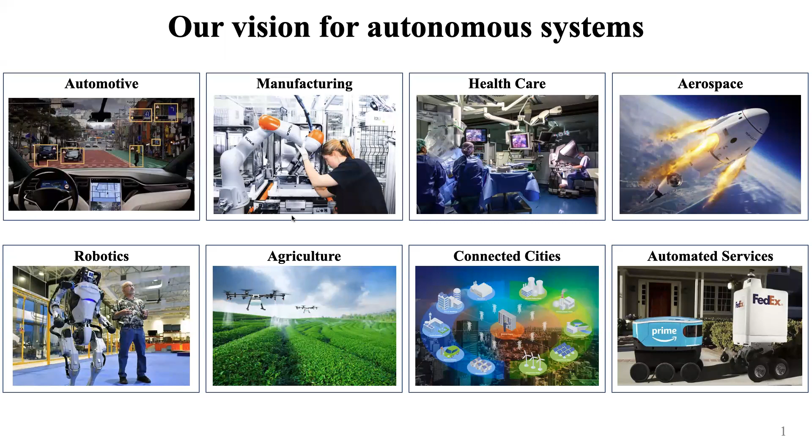Over the past years, the wide availability of data coupled with computational advances in machine learning and AI has really accelerated progress in building these autonomous systems. I've shown three videos here where you can see autonomous systems perform highly challenging tasks: Boston Dynamics robots, Tesla cars, and a drone fleet from the Kumar lab doing challenging tasks.

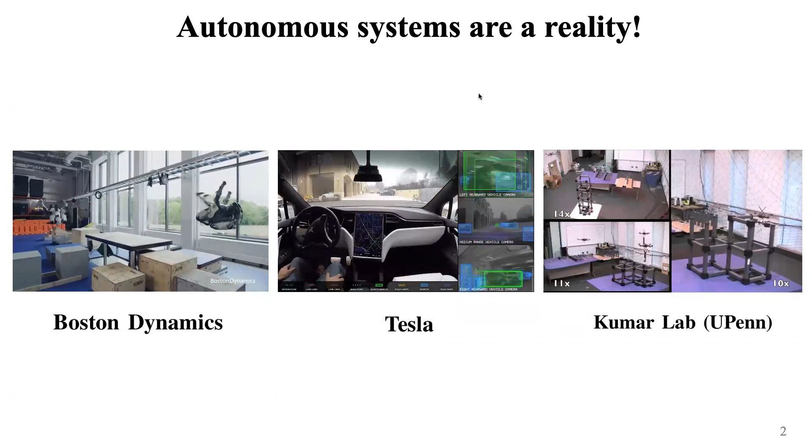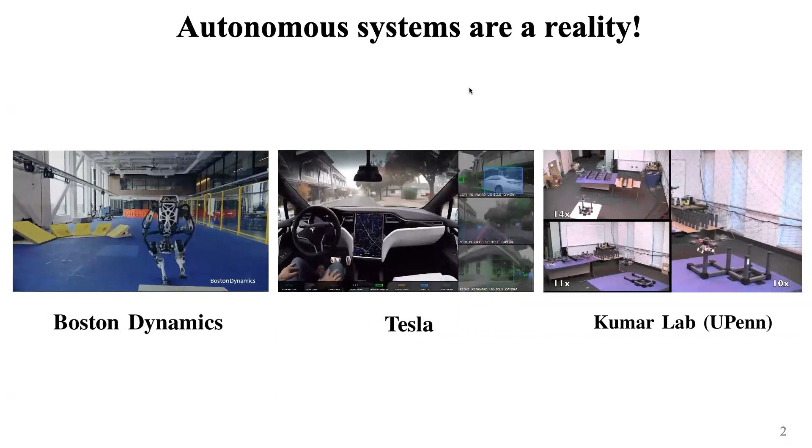From these demonstrations, one could certainly claim that autonomous systems are a reality. However, the question I would now like to ask is, do we really have all the theories and tools at hand to build autonomous systems that are also safe? I would argue the answer to this question is no.

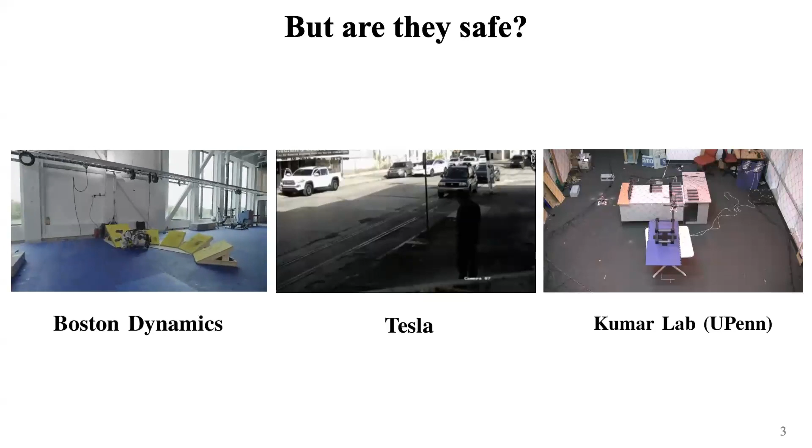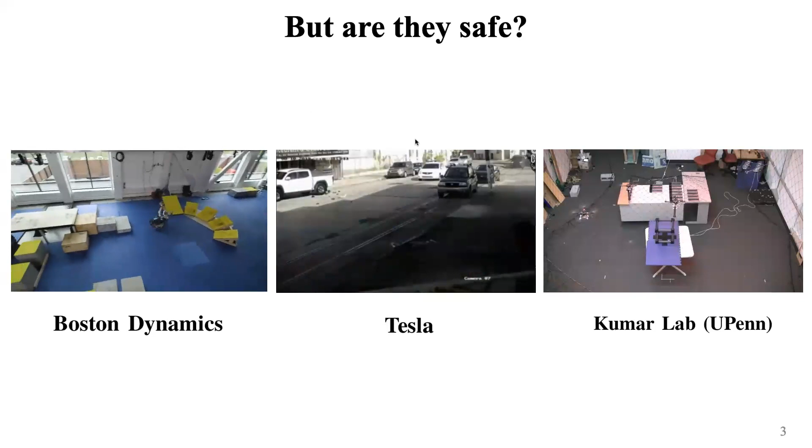Simply because at the same time we have observed a lot of failed demonstrations. We have seen Boston Dynamics robots failing, Tesla cars crashing, even endangering human lives, unfortunately in some cases even killing humans, and we have seen drone fleets collapsing. Even more so, it turns out that learning-enabled systems are fragile.

Going back to 2015, there was a big hype about self-driving cars, which there's still a big hype about. But as of now, we really don't have fully autonomous cars. Even worse, the industry has reset its expectations to only level 4 autonomy, meaning we will only achieve full autonomy in certain more controlled environments.

Due to these challenges, researchers, for instance from MIT, have focused on more solvable problems such as autonomous boats. So what are the problems and challenges we're facing? One problem is that the way we train our AI is fundamentally flawed. We train and tweak our algorithms in lab-like environments that then fail in real settings and under real circumstances.

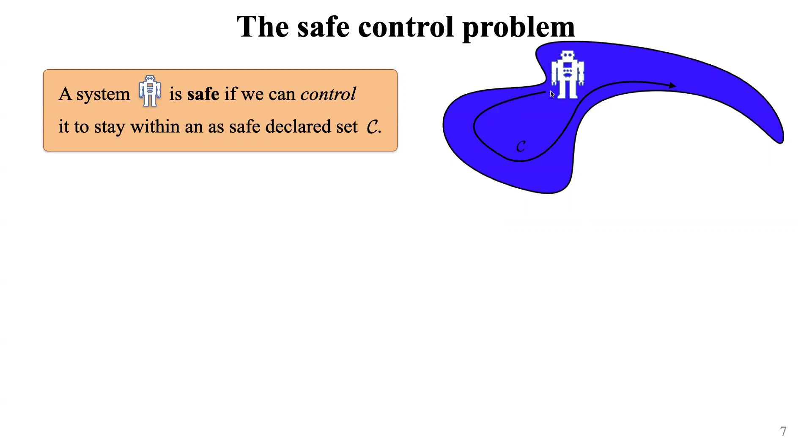So if we have a robot here and the safe set, the blue region, the robot is safe simply if we can control it to stay within the set. This is, of course, a well-defined and well-studied problem.

There are many existing techniques, one being simply handcrafting safe control laws, but this is typically limited to simple systems and often doesn't provide safety guarantees, for instance if we can't find suitable Lyapunov functions or something alike.

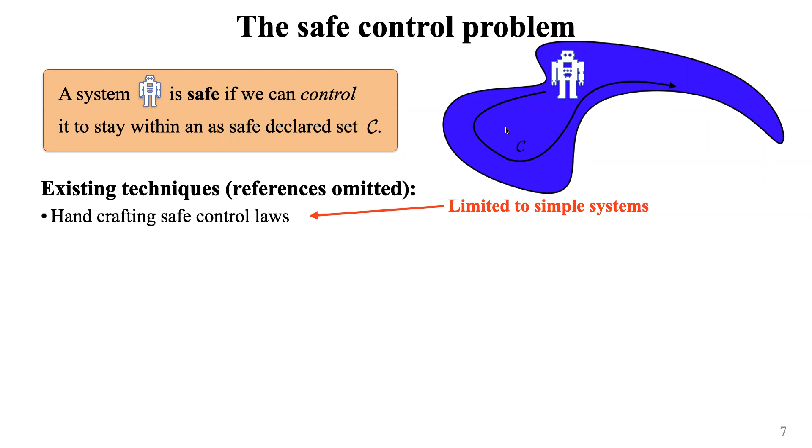There's a large body of work on sum of squares programming, Hamilton-Jacobi-Bellman reachability analysis, and discrete program synthesis, which comes more from the computer science domain. But all three share scalability issues, and using these techniques requires approximations.

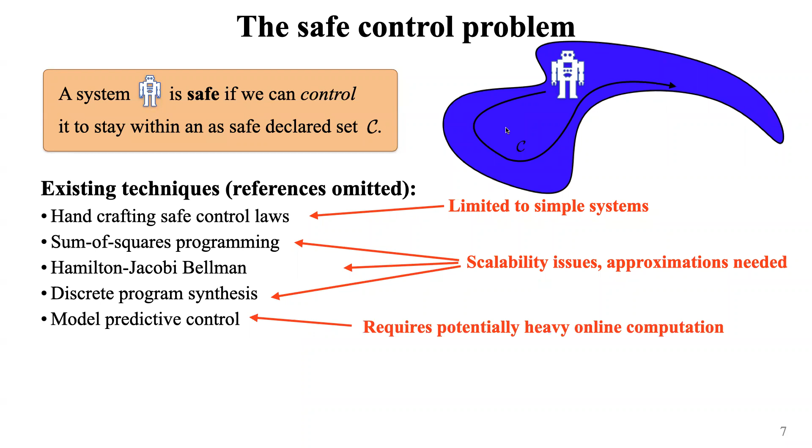Model predictive control is also widely used, but there one may require potentially heavy online computation, which can be restrictive. So in summary, finding safe control laws is challenging.

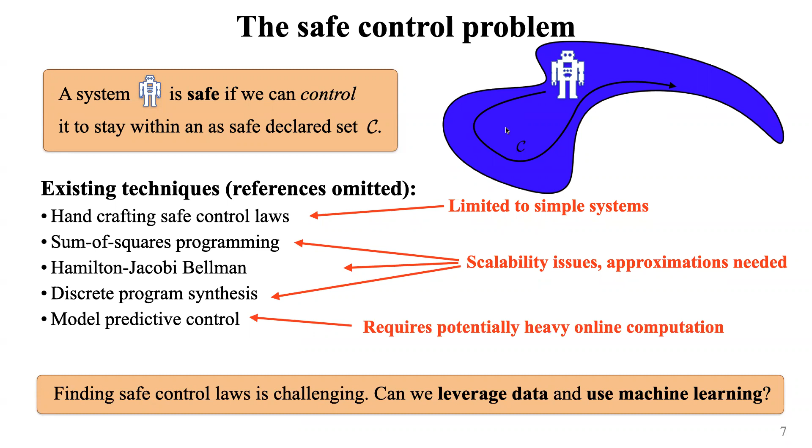However, I'd like to argue they share key properties that let us reason about their safety in roughly the same way. First, these examples are data-rich, in the sense that it's easy to get data exhibiting safe system behavior. For instance, in autonomous driving, we have a lot of safe driving behavior at hand.

Second, the dynamics of these systems are highly complex. They are nonlinear and often hybrid, meaning the systems are described by continuous motion as well as discrete events. For instance, when the bipedal robot's leg hits the ground, that's a discrete event.

But on the other hand, these dynamics are really well understood, and we have good tools to model our systems accurately. In this part of the talk, we want to use the availability of data as well as good models to learn safe control laws.

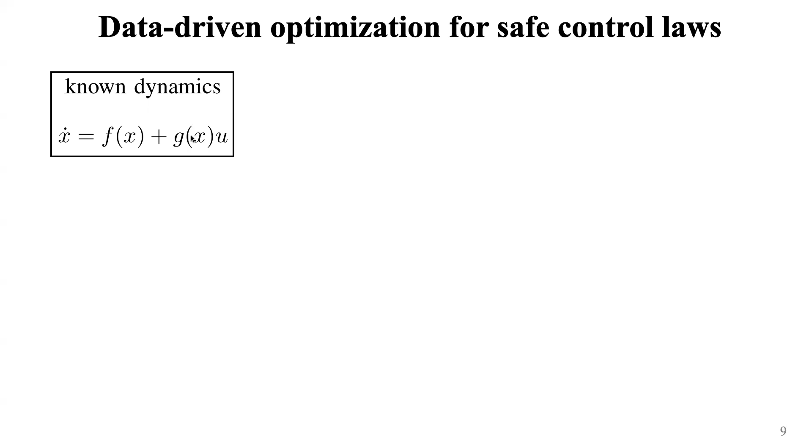Let me give you an overview of the framework. First, let us assume we know the dynamics. We'll relax this later to unknown and hybrid dynamics, but for now assume the system is described by this ordinary differential equation where the functions f and g are known.

Our contributions here are an algorithm with formal safety guarantees. We show how we can handle perception uncertainty, and we can do so even for unknown and potentially hybrid systems.

From now on it's going to be a bit more technical. I'm going to introduce the machinery we use to enforce safety, which are control barrier functions. So again, assume this ordinary differential equation, and assume we're given a function h that acts on the state of the system, for instance position, velocity, and so on.

Let the safe set now be defined via this function h as the zero super level set of the function h. So each point x for which h is non-negative will be considered safe.

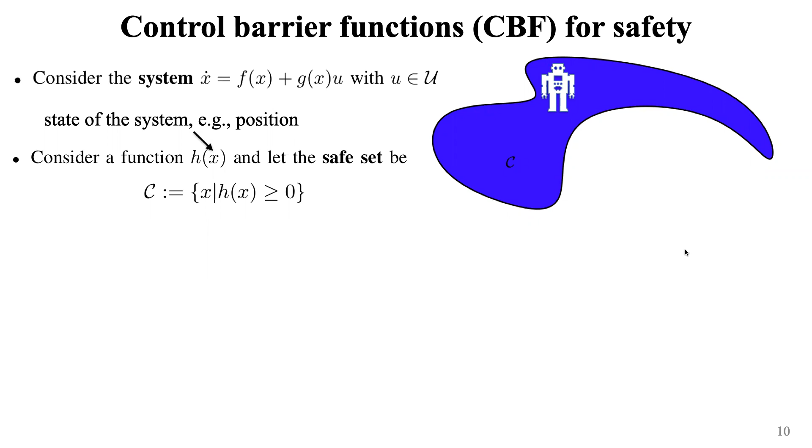Now, intuitively, what do we need to do to ensure safety of our robot? Simply, whenever we're on the boundary of the safe set, we need to make sure that we have a control input such that the time derivative h dot is non-negative. By the definition of the safe set, this will then guarantee safety.

This intuition can be formalized by the notion of a control barrier function. We say that the function h is a control barrier function if we can pick a control input such that h dot is greater than or equal to minus alpha, which is an extended class K function, a strictly increasing function that is 0 at 0, composed with our h.

This 0-at-0 property of the extended class K function in particular guarantees that we recover this condition, because on the boundary our function h is 0, so that the right-hand side on the boundary becomes 0.

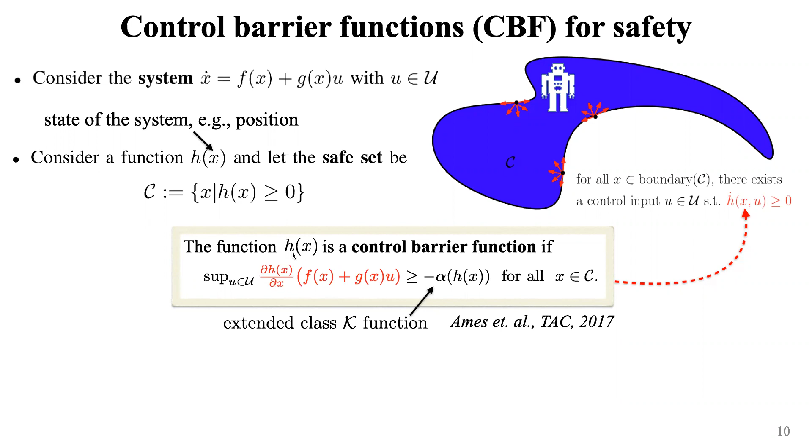Now, for the particular dynamics we're looking at, which are input affine in u, this h dot expression simply evaluates to the gradient times the dynamics. The reason I'm showing this equation is that once we've shown we have a valid control barrier function, this constraint is linear in u, so we can get a safe control law easily. Just one piece of terminology: I'll refer to this constraint in the remainder as the CBF constraint.

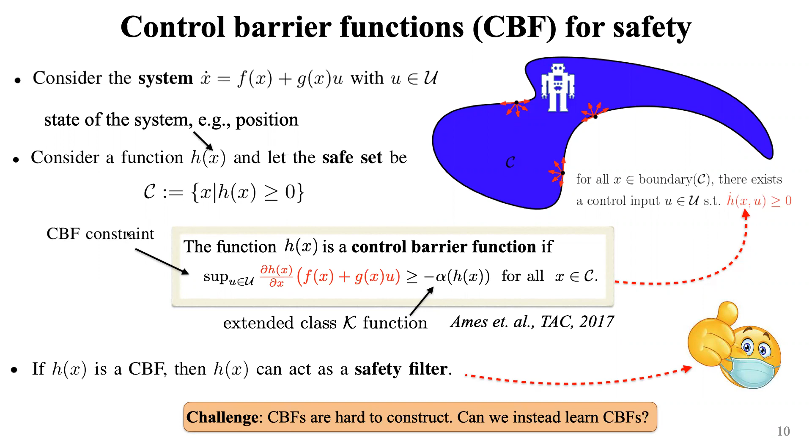Once we have shown that we have a valid control barrier function, life is great and we have a safety guarantee, okay? However, the difficulty and bottleneck is really that it's hard to construct these control barrier functions, and we would like to learn them from data here.

We want to find a function h that comes from a certain function class, calligraphic H. This could, for instance, be the class of neural networks. And we would like to, on top, minimize the complexity of our function.

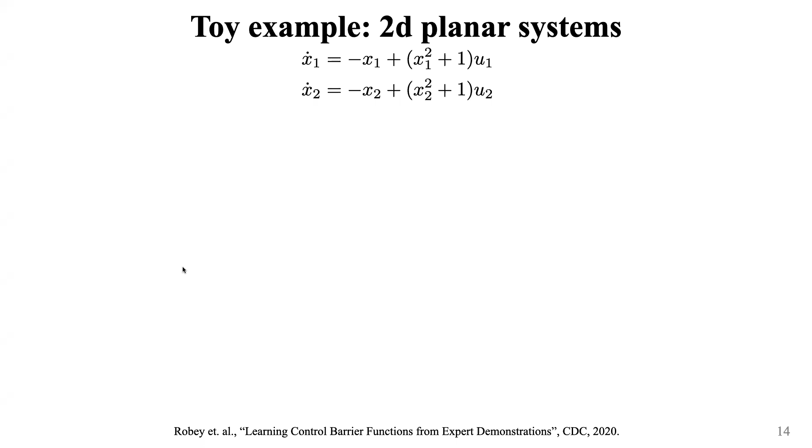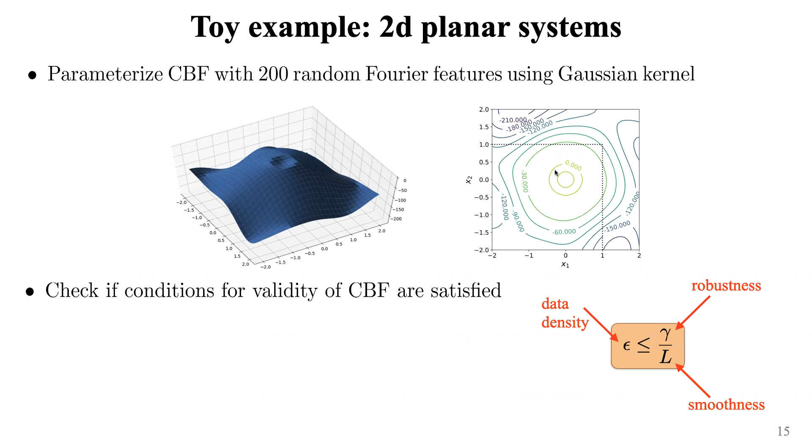From this data, we learned a control barrier function, parameterized in the convex way I just talked about, using 200 random Fourier features. You can see the level sets shown here. The ring in the middle indicates the safe region, which you can also see in the 2D plot.

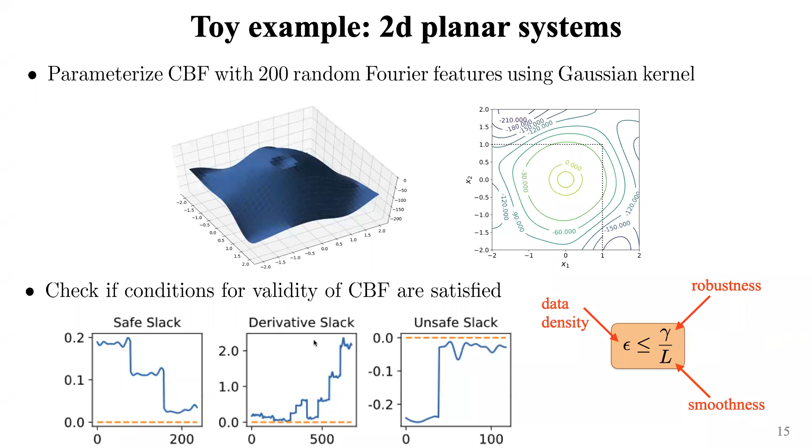Now we need to check the conditions I talked about: data density, robustness, and smoothness, and we need to do so for all three types of constraints. What we see here is that this holds for the safety constraint, the unsafe constraint, and the CBF constraint. So we have, in fact, learned a valid control barrier function.

So far I've assumed that we know the dynamics of the system exactly, and I promised I would relax this assumption. That's what we're doing now. In general, the functions f and g may not be known. However, we may have accurate models f hat and g hat, along with error bounds delta f and delta g, that bound the point-wise difference between the system and our model.

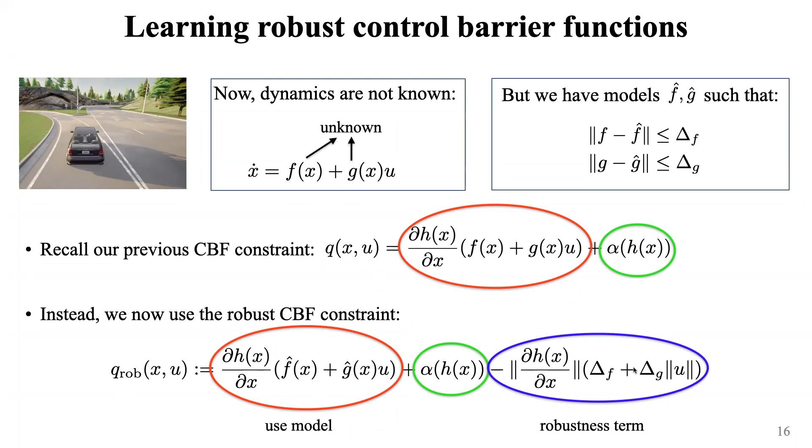What we can then do is replace our CBF constraint, recalled here for completeness, with a robustified CBF constraint. We replace f by f hat, keep the extended class K function as it is, and add a robustness term that includes delta f and delta g, quantifying the error our models may have. Then, in our learning problem, we simply use this robustified CBF constraint.

We have implemented this in an autonomous driving simulator, Carla. On the left-hand side you can see an expert controller, in this case a PID controller, but it could really be a human operator, from which we unroll trajectory data and learn a CBF shown on the right-hand side. Not surprisingly, the learned CBF controller closely imitates the safety behavior of the expert controller, and by that, our algorithm stays safe.

Now, so far I've also assumed that we know the state of the system X exactly. However, this may not always be the case, and we focus on scenarios where we have high-dimensional sensor measurements available, for instance dashboard camera images.

For such high-dimensional sensors, the sensor map P is unknown, but it's a reasonable assumption that there exists a hypothetical inverse that would recover the state. This inverse is, of course, unknown. In practice, from dashboard camera images, we may estimate or recover the state of the car, such as its position.

Under this assumption, we assume we have an estimator P hat available that recovers our state X hat, and that our state X and the estimate X hat are bounded by some delta P. So we assume we have a bounded state estimation error. We're playing the same game as before: we have our original CBF constraint, and we use a robustified version by first replacing the unknown state X with our state estimate, and adding a robustness slack term.

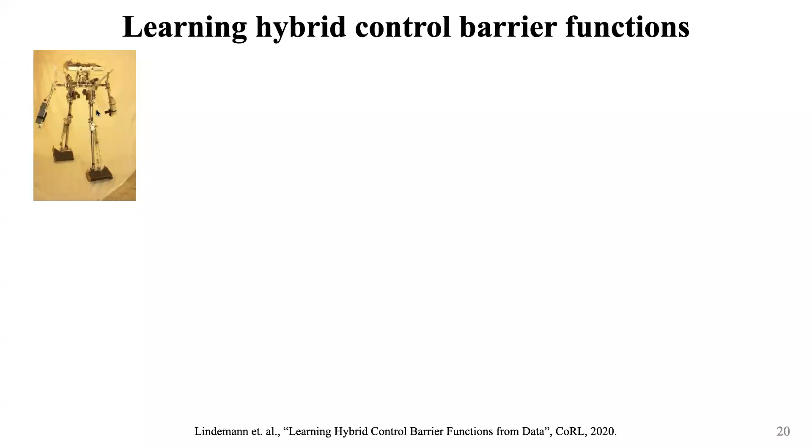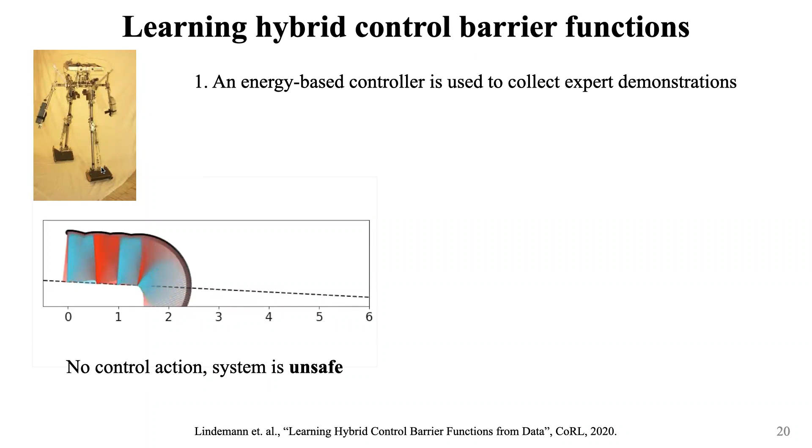Lastly, I'd like to talk about hybrid systems. I won't show the theoretical result, just an experiment we did with a passive walker, a small walker walking down an inclined ramp. It has actuation in the hip and ankle joint. However, if we don't actuate the system, the walker will just fall down after a couple of steps. So what we did was use an energy-based controller from the literature to collect expert trajectories.

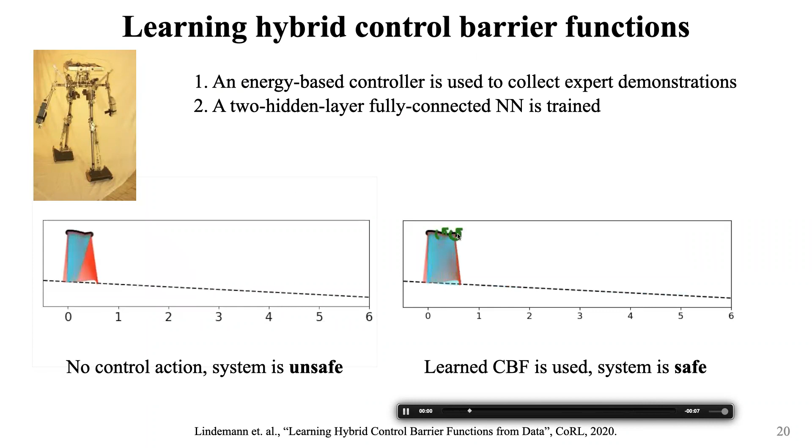We trained a 2-hidden-layer fully connected neural network. The result you can see here: the walker walks down the inclined ramp safely, and the correcting control actions are indicated by these green arrows in the hip and ankle.

We suspect this is because we induce a lot of robustness in the learning through these robustness flags, gamma, if you recall, so that at least in this example, our CBF controller is even doing better than the expert.

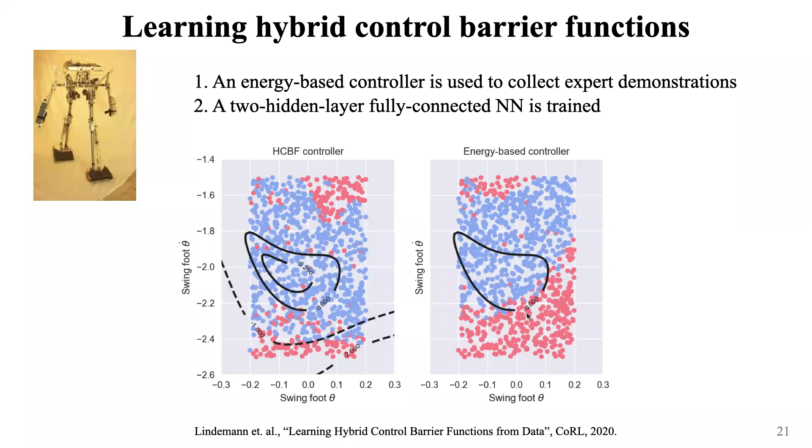By this, I'd like to conclude the first part of my talk and jump into the second part. While the first part focused on learning safe control laws by largely neglecting the environment, I'd now like to focus on autonomous systems that really have to operate in unknown and dynamic environments. My ultimate goal is to design verifiable and uncertainty-informed motion planning algorithms for systems operating in dynamic environments. Let's first take a step back and look at a modern autonomy stack.

This autonomy stack typically consists of a system—in this case a car—as well as the environment, which may be unknown and dynamic. On top of that we have sensors: camera, LiDAR, and radar. And we have perception algorithms that map sensor measurements into state estimates, states of interest for our planning and control module.

Now, in such a modern autonomy stack, especially the perception module has complex layers of neural networks for semantic labeling of agents in the environment, as well as for predicting their future motion. Similarly, in the planning and controls module we may have neural networks—for instance, as I introduced in the first part of the talk, we may have learned CBFs.

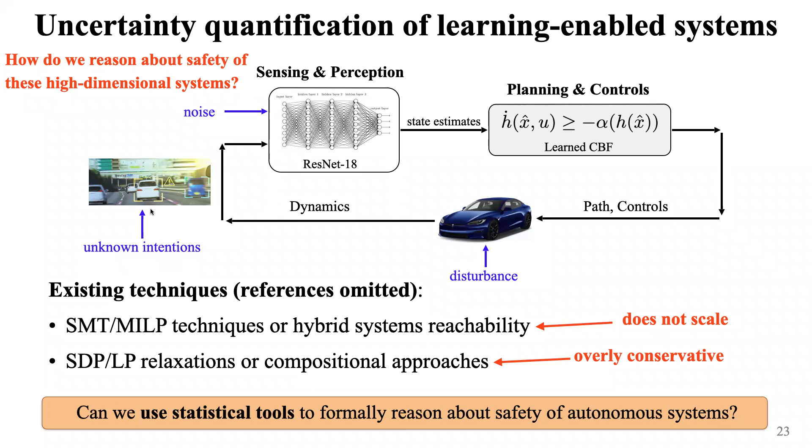So what I would like to do is navigate this trade-off between scalability and conservatism, and be able to deal with the randomness that enters this closed loop system. The question we were asking ourselves is: can we use statistical tools instead to formally reason about safety for autonomous systems?

I would now like to pick a particular autonomy problem, which is the safe planning problem in dynamic environments. In this problem, we would like for an ego agent, an ego vehicle let's say, to find a path that avoids dynamic agents in the environment with a probability of 1 minus delta. So if we have the car over here, we would like to plan a path that avoids other cars and other pedestrians in the environment with a probability of at least 1 minus delta.

What are the challenges here? Like I said, we have complex perception and prediction algorithms in the loop, and it's difficult to quantify uncertainty of these algorithms and bring them into play.

Now, there exist a lot of planning techniques that I want to mention. Vanilla motion planners, for instance graph-based methods, however these typically ignore the dynamics of the agents. There are reactive methods, for instance navigation functions, however they don't use predictions of how agents may evolve in the future and are hence conservative.

By using predictions, we can really improve the safety of the system. On top of that, these methods often assume simple dynamics. More recently, there are predictive methods that use predictions of the environment in interactive and non-interactive ways, and they solve the problems in belief space. However, to do so, often approximate solutions are found, or simplifying assumptions are made.

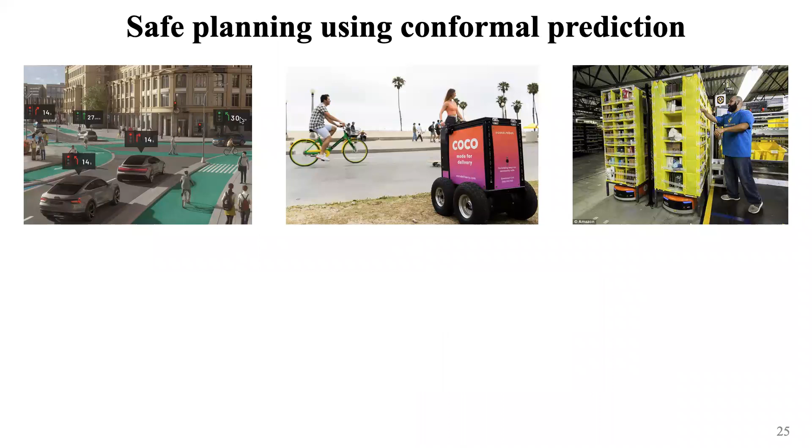I would like to motivate our approach by 4 observations. Looking at these 3 pictures, we can observe that the robot dynamics, again as in the first part of the talk, are well understood, and the robots can be modeled accurately. So we can model cars, we can model mobile robots with sufficient accuracy.

However, when it comes to dynamic agents such as pedestrians, these are highly uncertain, and in general super hard to model. What we however have is we're living again in a data-rich world, and we have large data sets that describe the motion of dynamic agents. On top of that, we have really powerful motion predictors, accurate learning-enabled motion predictors that we can use together with these data sets.

So what we want to do now is use these 3 things: the models of our robot, the data sets describing motions of dynamic agents, as well as our motion predictors. On top of that, we want to use statistical tools, such as conformal prediction in this case, to quantify uncertainty of our predictors and to use these downstream for uncertainty-aware motion planning.

Let me give you an overview of the framework that we propose. We start with assuming that we have an offline trajectory data set. So in this case, assume that we have observed a lot of trajectory data from pedestrians that walk at an intersection.

Now, during runtime of the system, we make observations. So at time t, during runtime, we say that we have observed how this pedestrian illustrated here walks, or has been walking over the past 5 seconds, and we indicate or denote this by the variable y.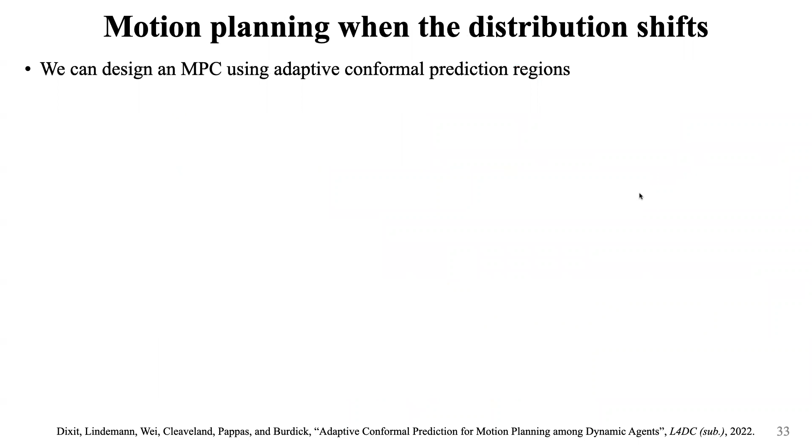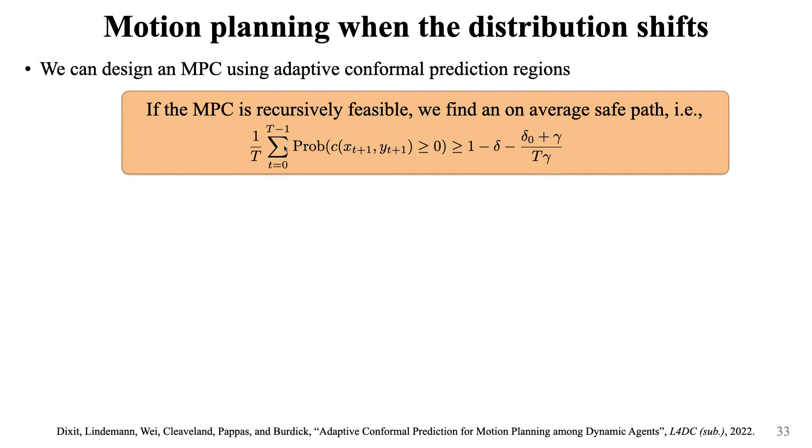We can go ahead and use these adaptive prediction regions again within an MPC. What we then show is that if the MPC is recursively feasible, we find an on average safe path. By that, I mean that if we average over the probabilities over time that we satisfy our safety constraint, these average probabilities will be lower bounded by 1 minus delta minus a correction term that consists of delta 0, our initial guess of delta, plus our learning rate divided over the mission time t times gamma. As t goes to infinity, this term will vanish, and we will on average have safety with 1 minus delta probability.

We implemented this on a drone, running this MPC, to avoid a flying frisbee. This flying frisbee has highly nonlinear dynamics. Our drone is modeled as a second order system. I just want to show a real quick empirical evaluation that we did.

Here we have a delta of 0.025 in one column and 0.05 in the other. We analyze the success rate, so how often we satisfy the safety constraint, and the minimum distance between the drone and the frisbee. Here is our proposed method, which we compare to 2 competing methods, one using an extended Kalman filter, another using a type of risk tightening approach. The interesting observation is that we would like constraint satisfaction at 97.5%. We exceed that with 99.2%, which the other 2 methods also do. However, we're much less conservative. We have an average distance to the drone of only 3 meters, while the other methods have 14.2 and 5.3 meters, which shows that we can operate closer to performance limits.

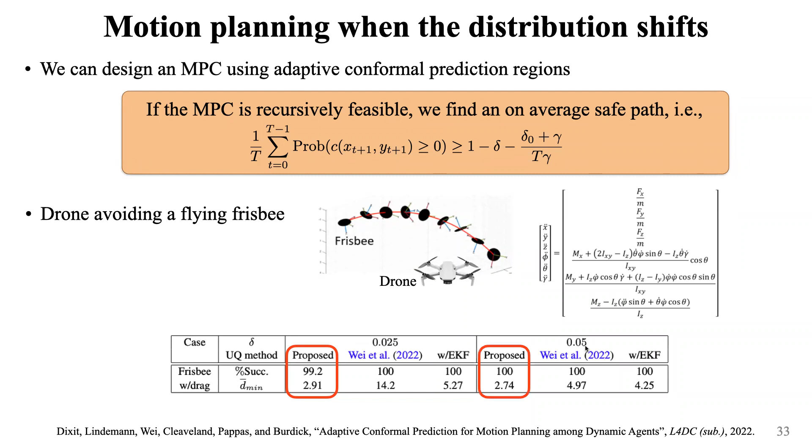This is an indicator for us that the other 2 competing methods were largely overestimating the uncertainty, while we have a realistic estimate of uncertainty that lets us operate less conservatively. The same applies for the case where we have a delta of 0.05.

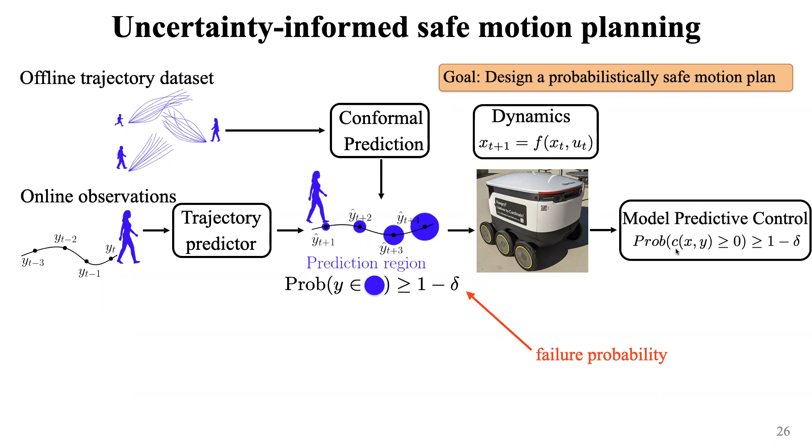Yeah, thank you for the invitation. Yeah, thanks for doing this despite having your job interview, basically, so really appreciate it. No worries, multitasking is the way. And I will follow up with the video once this is edited, and I wish you all the best for the next steps. Thank you so much. Yeah, have a good rest of the day, everyone. All right.